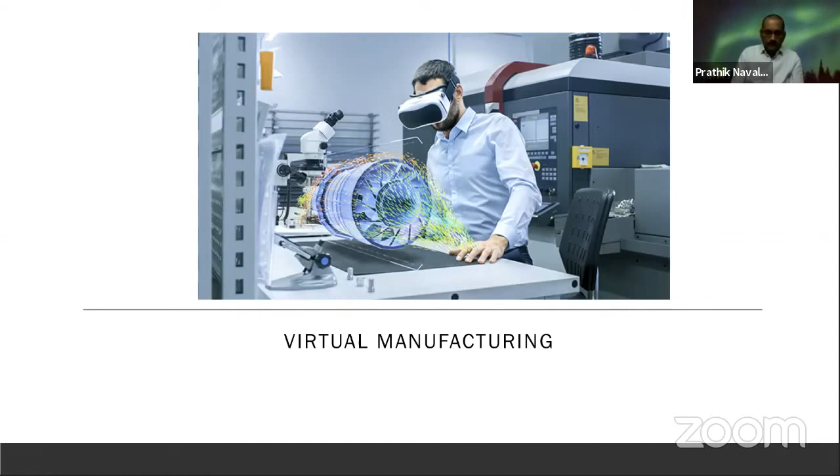Okay, so here we go. So what is virtual manufacturing? What I stated here are basically the definitions which I have understood based on my working in this field. So it's performing activities in support of manufacturing virtually. Virtually means you're off-site. You're not physically at the location where the manufacturing happens, and you're doing it on a computer.

And we know manufacturing is basically a conversion of raw material into usable form. It could be steel, it could be tubes, hoses, any other things. It is also conversion of usable raw material into finished products as per the customer specification. So these are the definitions of manufacturing which we have learned during our education.

Now, virtual manufacturing basically evolved with globalization. As companies grew and started having multiple locations, and as the need for standardization grew, there became a need for having a centralized manufacturing team. And along with that need, there was an evolution of the application, which basically paralleled the digital technology evolution.

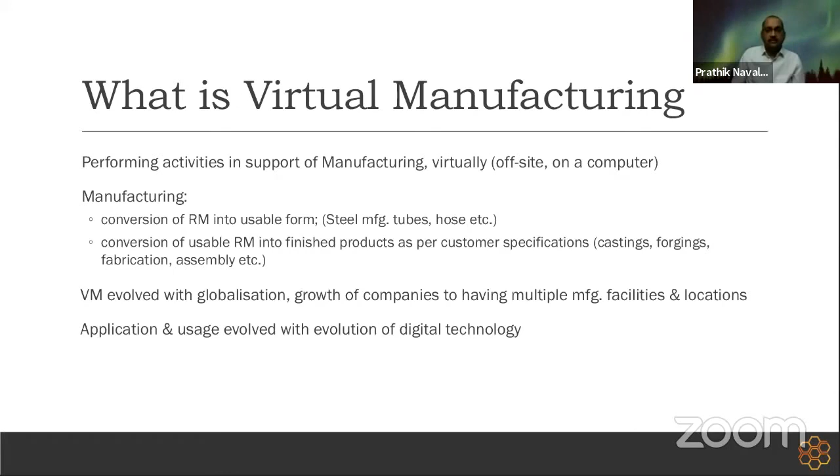So in the initial days, there was one factory located at some local manufacturing location, and they had their own local manufacturing engineering teams doing the process design, the layouts, the line design, implementation, prove-out, production. So basically, it was dedicated.

Pratik, I think your slide is not changing. Currently, what I see is the virtual manufacturing slide. Oh, is it? Sir, I can see the local manufacturing slide. It's changing, sir. Okay. Maybe it's my side.

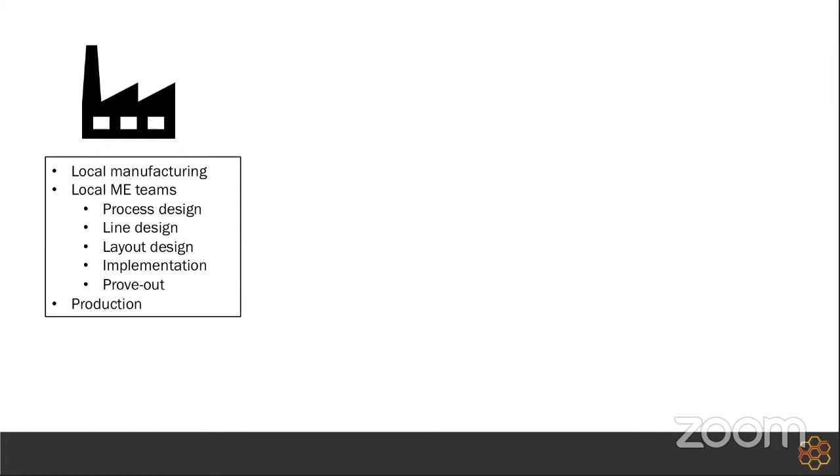No problem. So, like I said earlier, with a dedicated team supporting each factory, the companies were producing. But as the need for the products went higher, as globalization expanded, things changed. Earlier, they had a local culture, local people, it was easy to interact, they could speak the same language, and they all grew up in a similar background. Hence, the productivity, the overall outputs, the issues that came up were easy to resolve and move forward.

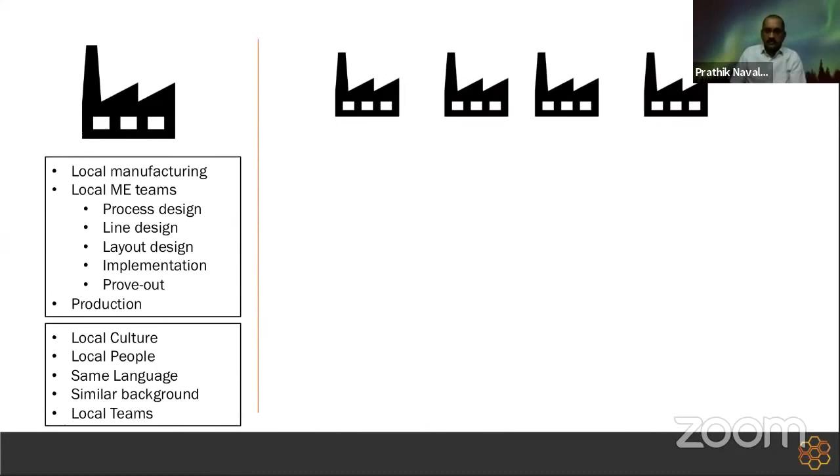However, upon globalization, the factories started at multiple locations, and either the suppliers were from different places or the same product was made in different locations. And there were multiple supplier sources, multiple stakeholders across the globe. So then came the complexity of cultural differences, languages, communication. Hence, communication became a big challenge.

So companies realized the need for standardization. No matter where the product is made, it has to be made the same way. And it has to have the common parts. Only then the cost benefit is leveraged.

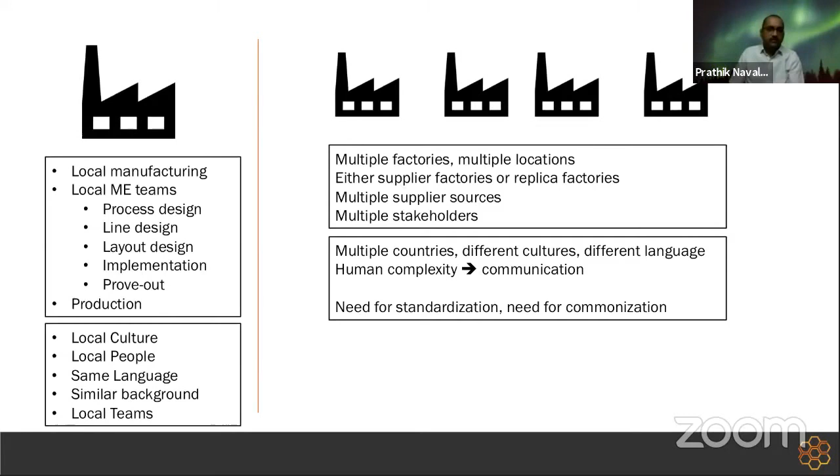So with this came the concept of virtual teams. Virtual teams, centralized manufacturing, design and manufacturing teams sitting virtually in an offshore technology center, supporting the multiple factories. And they were the ones driving the standardization of process and tools, while keeping in mind the local requirements to support the factories.

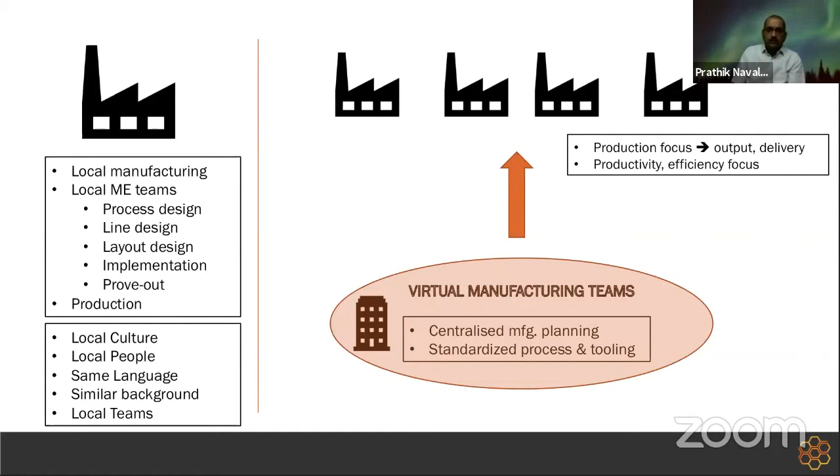And the local factories were to focus on the day-to-day work, daily production and output, production, delivery. That way, the businesses were able to leverage the best out of their investments. So this is the background of virtual manufacturing, how it evolved.

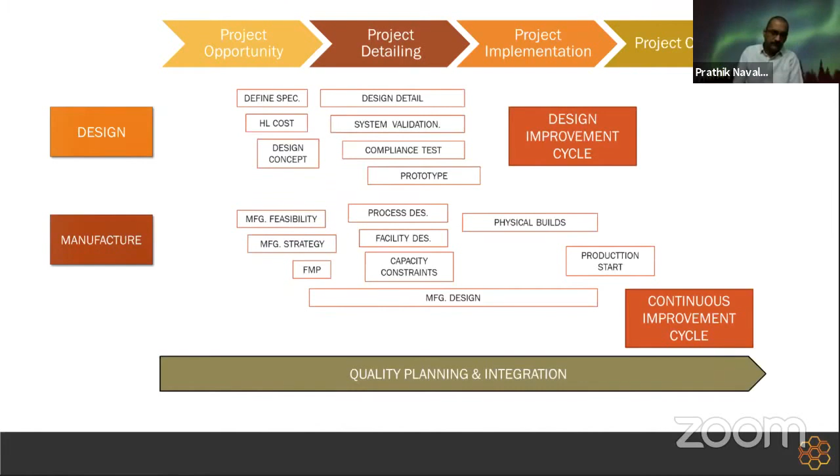Moving on, now we'll focus a little bit on the design cycle. So when we look at global design today, a design consists of parts. Parts go into a component, components go into a system, and systems go into a product. So this is probably the simplest version I could put forward to give the sense of complexity that exists in the real-time world today.

So when you look at some of the common machinery that is on the road today with agriculture or construction, there are typically about 30,000 parts that go into the machinery. So these 30,000 parts again get accumulated as components, systems, and products. So what companies do is they have their virtual engineering teams, individual design engineers designing the parts at a part level. And then there would be an integrator who would integrate it into components and systems and products. So these are today possible only with use of digital tools, like you will see in the upcoming slides.

So now when we talk about a part design, I want to also mention what is significant about part design. Okay? Although we're talking about virtual manufacturing today, it is important for us to understand the virtual engineering portion of it, which is primarily focusing on product design, because today design and manufacturing are not two sides of a coin.

They work very closely hand in hand, as you saw in the earlier product development chart. So it is very important for us to understand the constraints and the philosophy of design as the product gets progressed in its life cycle.

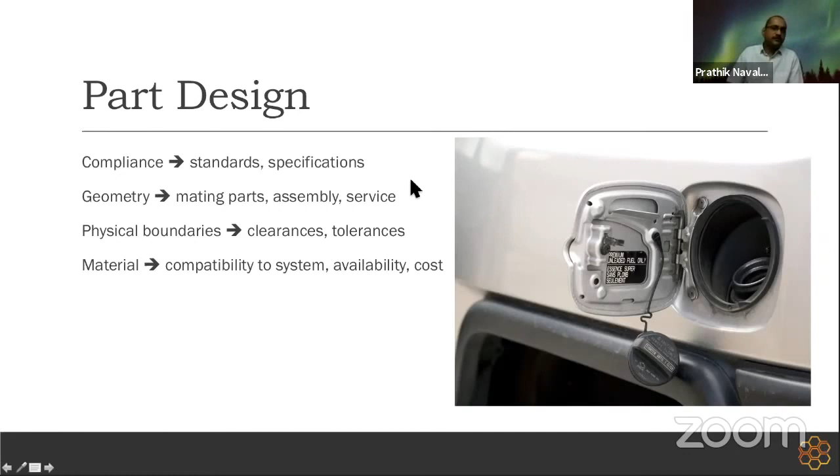So it becomes very critical for a designer today to visualize how overall the parts come together to form the component. So this is an example where the digital tools which we spoke of yesterday, and the virtual visualization, come into play for effectively designing the components. When a designer who's sitting virtually and designing a part is able to understand how it fits into the next level of the component, he is able to understand the constraints better and churn out the design first time right. And then there is virtual validation.

Virtual validation is a key part of virtual engineering, where many companies no longer go into lab tests. What they do is use the advantage of the digital technologies to do the virtual simulation. For example, if it is structural validation, we have finite element methods, and today's software is capable of handling advanced complex designs and still giving you a reasonably predictable result.

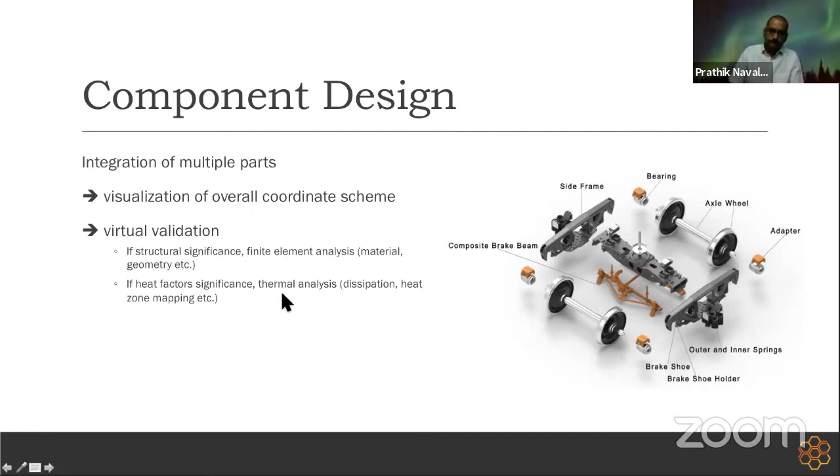And this is an example now where the finite element method was actually used not to check the structural integrity, but to derive the loading and boundary conditions for redesigning this component using composite materials. So this was for an advanced research project.

This was done. And so there we simulated the existing brake beam. This is the beam that applies the brake on the wheels for the train. And the loading conditions were put in. And this pattern was used as a benchmark or as a maximum load criteria for design of the composite bogie.

Okay. So what is of importance for today's engineers is to understand that in finite element methods, the person must have a good functional understanding of the system before he or she gets into it, understand the material properties, the boundary conditions, the loading, and also the interpretation of the results.

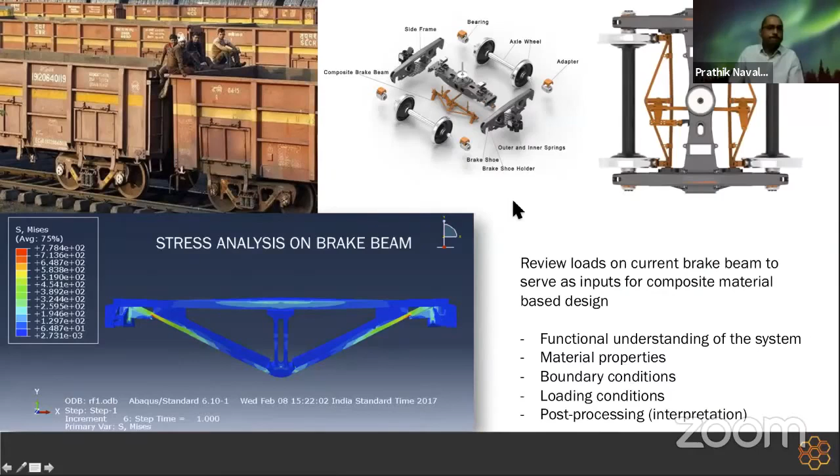Again, here it was also used as we had benchmarked an existing bogie to validate the loads and boundary conditions for a new bogie bolster design. Again, a practical example being used in the industry today.

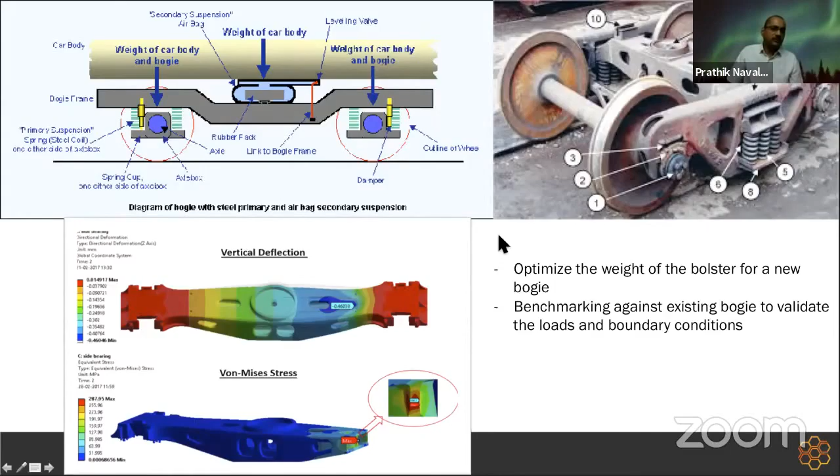So we spoke about part design, we spoke about component design. So next stage in this is a system design. So when the components accumulate to form a system, when the components are integrated within a system, it's important to make sure there is a functionality check that is done. Okay, so there are several tools today in the market for performing.

For example, if we take the suspension system of a two-wheeler or a four-wheeler, it is going to be complex for us to go and do manual calculations and also visualize how the system would function on the road, right? So earlier, how they used to do it is they used to have cameras embedded to understand the vertical and lateral movements and have strain gauges attached to them to understand the loading criteria.

So now what's happened is with advance in the digital front, there are softwares available to perform what we call multi-body dynamics, to understand the dynamics of the interaction of different parts, what we call bodies, which interact with each other and which are constrained by each other.

When a suspension system is attached to the chassis and to the axle, it is constrained at those 2 points. So when it functions, it is not allowed to freely function, but it works under constraints. So that's a simple explanation of that. But MBD assessments are very common today in the automotive field.

Then the other thing that is done is clearance analysis. Again, when multiple parts, to the level of 30,000 parts, are going into a system, and if there are 25 different engineers working on it, it's very common for people to miss out on some of the features of the part.

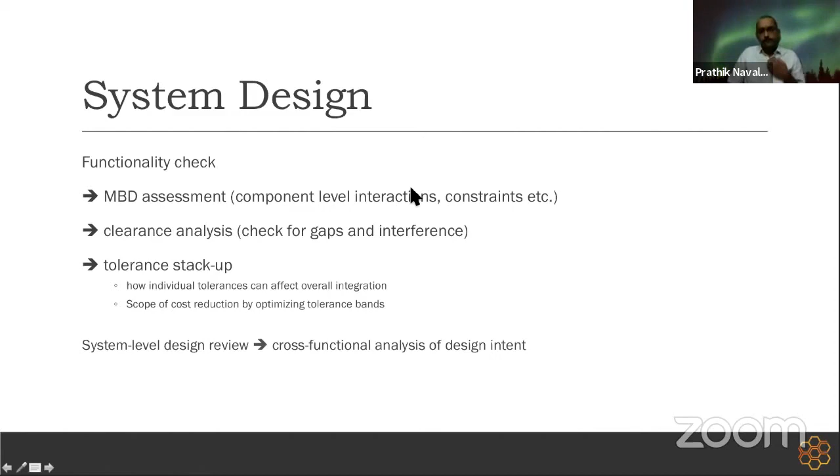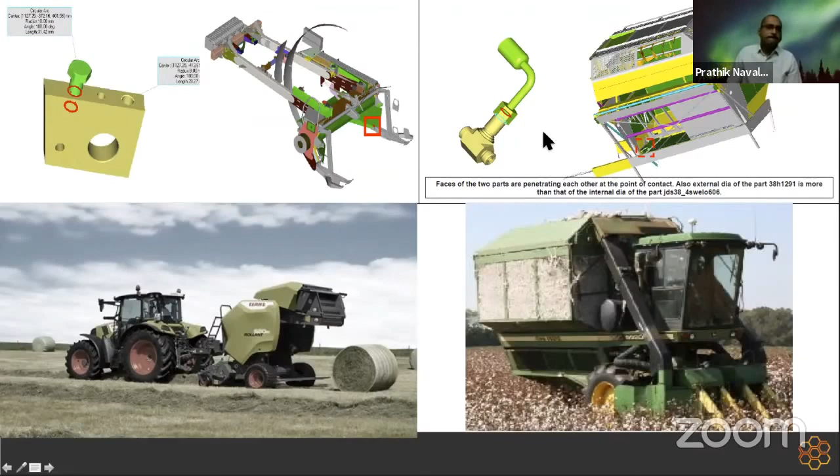Another example that you see here is on a cotton picker, again, for the basket, where there are multiple components that are welded and assembled. There is a clearance analysis that was performed, where for the joints, again, the clearances between the two faces of the mating parts was high. Again, this is a practical example of where it is used in the industry today.

Next, we talk about tolerance stack-up analysis. So while this has been a quality function, nowadays it is falling on the plates of a manufacturing engineer and in some cases a design engineer, where at the time of design itself, they go back and validate at a system level and at a component level how the tolerances stack up and what room they have to increase the tolerance bandwidth so that they're able to reduce the overall cost.

And what you see here is a typical representation. When the tolerance band is wide, the cost is lower and the yield is high. Yield means the output. The first time right is the yield. And when the tolerance band is reduced more and more, the costs become higher and the yield becomes lower. Okay? So it is very important for a designer today to ensure that the tolerances are done in a commercially viable sense, at the same time, functionally viable sense. So next, we'll see a video of how the digital tools today enable a manufacturing engineer to perform this analysis as he validates the design.

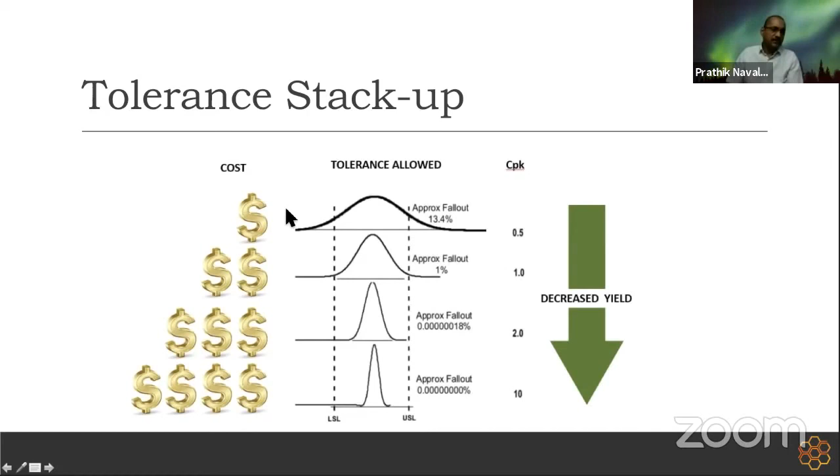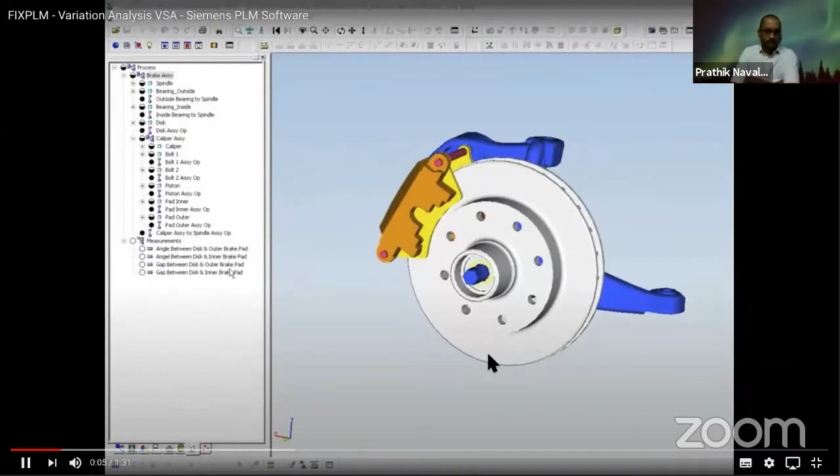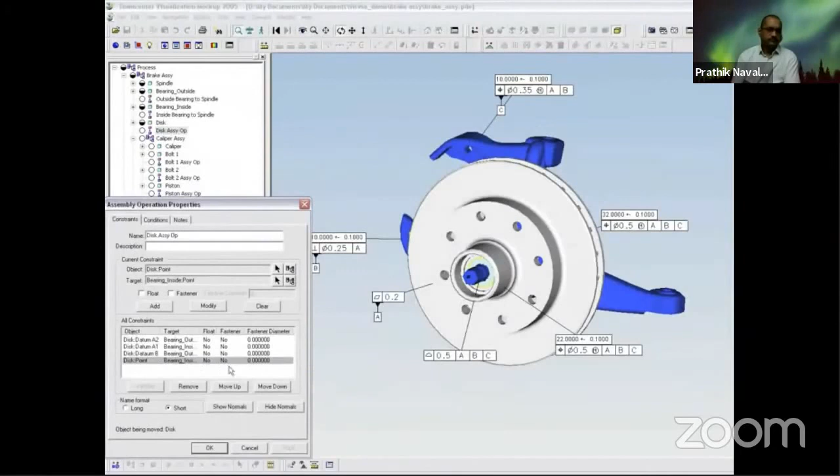Variation in assembly build problems. In this example, we'll look at the variation introduced through the process of building an automobile brake assembly, where controlling the angular variation between the brake pads and the brake disc is critical to the proper function of the braking mechanism. The entire process model is represented in a tree structure on the left side of the window. The process tree contains all the elements that comprise the analysis: parts, assembly operations, and measurements. The features contained within each part that are used as datums in assembly operations or for measurement are toleranced using GD&T, or geometric dimensioning and tolerancing.

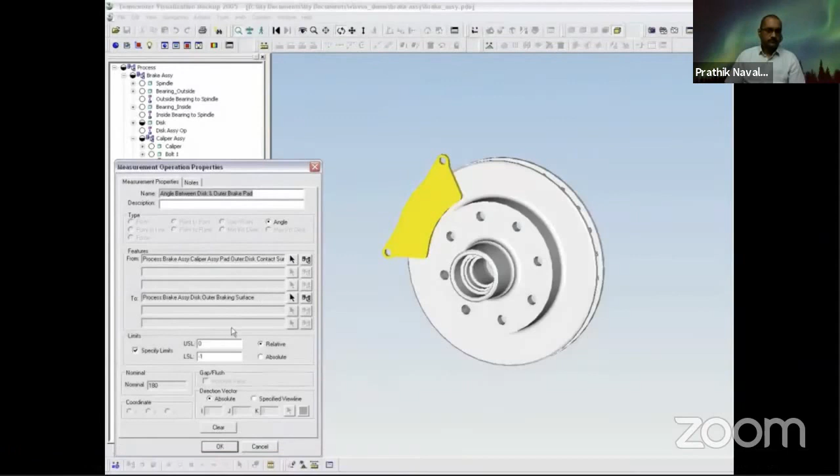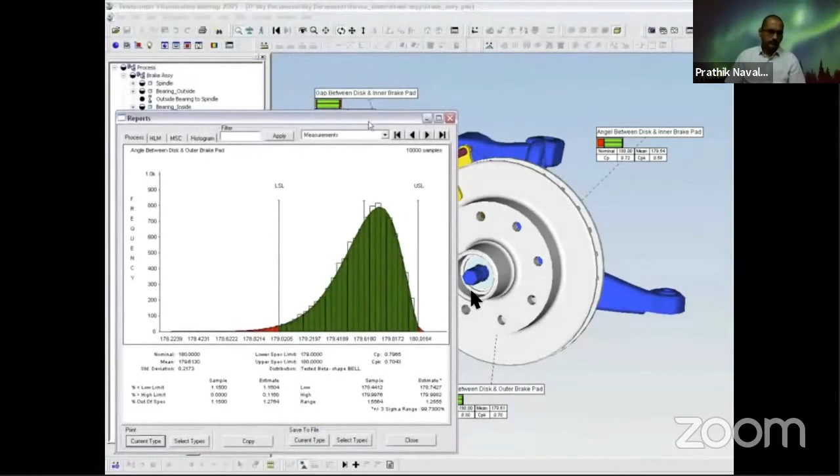Once the features and tolerances for all parts have been defined, assembly operations identify how these parts will assemble or interact with one another. The next step is to define the measurements for the critical dimensions to be controlled. In this case, the angle measurement between brake pad and brake disc. Once the process model is defined, simulations that replicate the virtual build of the brake assembly are run. From the reports generated, the variation magnitudes and contributors may be viewed for each measurement. Model parameters, such as tolerance values, may be changed and the simulations rerun to ascertain the impact of the change across the entire assembly.

So what we saw there was the tolerance stack-up analysis for this wheel disc assembly as it was narrated. And this is something that today is a very common sight. You go back and see design engineers and manufacturing engineers who use such tools. There are many tools available in the market where they are able to concurrently modify the designs and determine the adequate tolerances for the parts, thus being able to deliver a product first time right, at the same time at the right target costs. Okay.

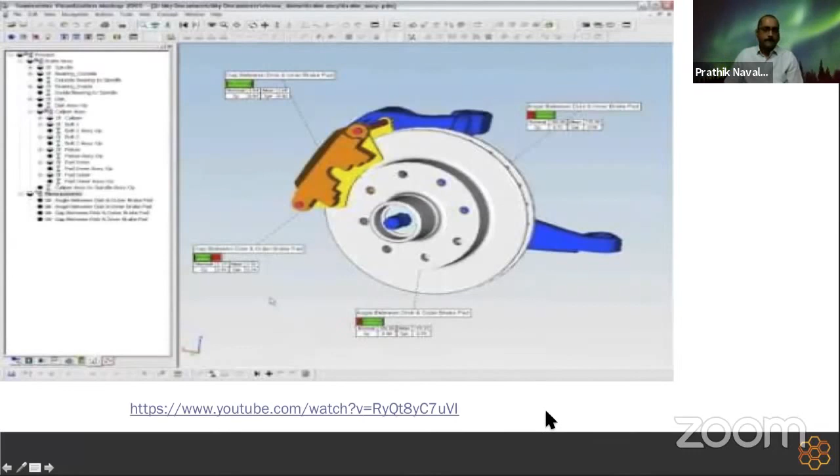So just a second. Okay, so next we come to, so we saw part design, we saw component design, we saw system level design. Okay. So now when all of this integrates into a product, that is the end saleable commodity for which all the groups have been working towards. So it's important for the designers now to look at systems integration, how the systems integrate. So this is a very, very important and critical function that you will see in the video to come.

And as they look at the integration of systems, they are able to dynamically modify the designs through digital technologies available today. Another key feature which you will see is the marketing alignment. Much earlier in the concept stage itself, companies today use virtual reality capabilities to showcase the upcoming product to their dealers and their customers, to receive live feedback so that their valuable feedback gets integrated much earlier in the product design lifecycle. Again, another video that I'll show you towards the end showcases this capability.

And then the compliance check. Okay, today when a tractor is designed, when a car is designed, they have to comply to certain specifications, such as the turning radius, the overall boundary of dimensions, the emissions, etc. So these are possible, again, like I mentioned before, through use of virtual tools.

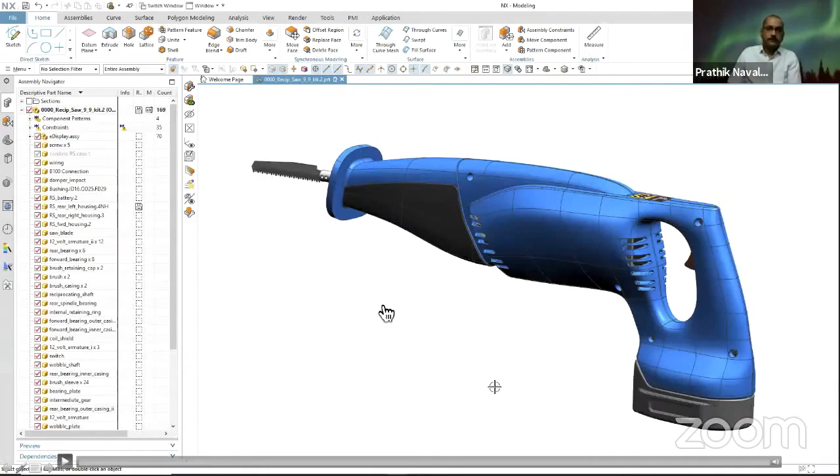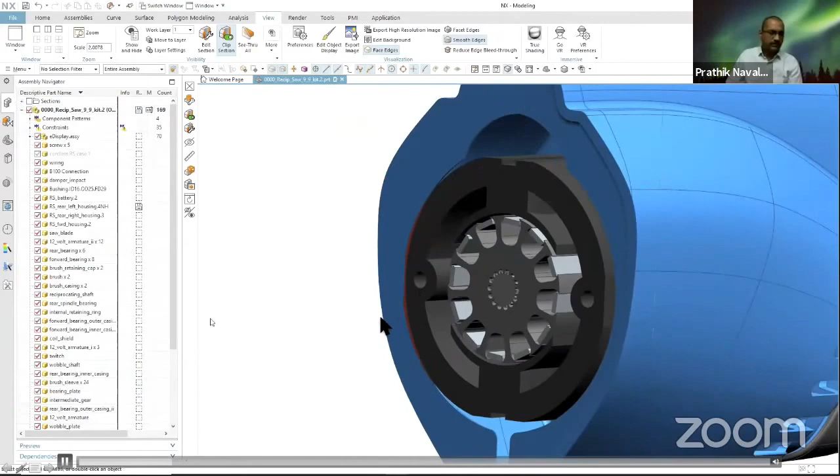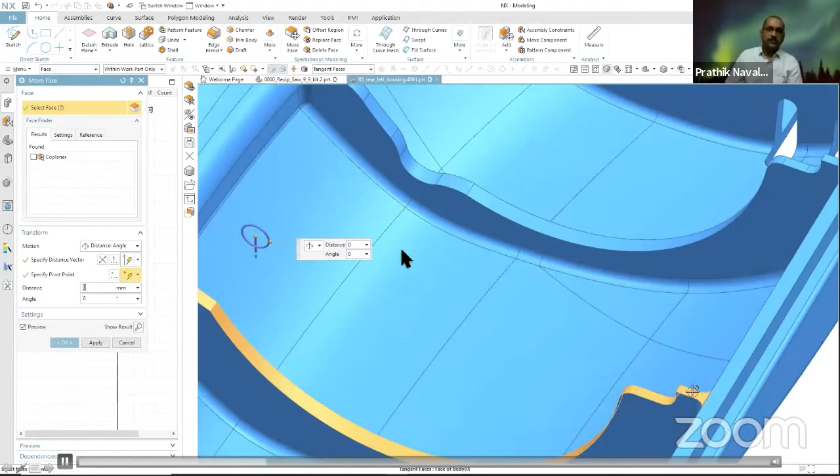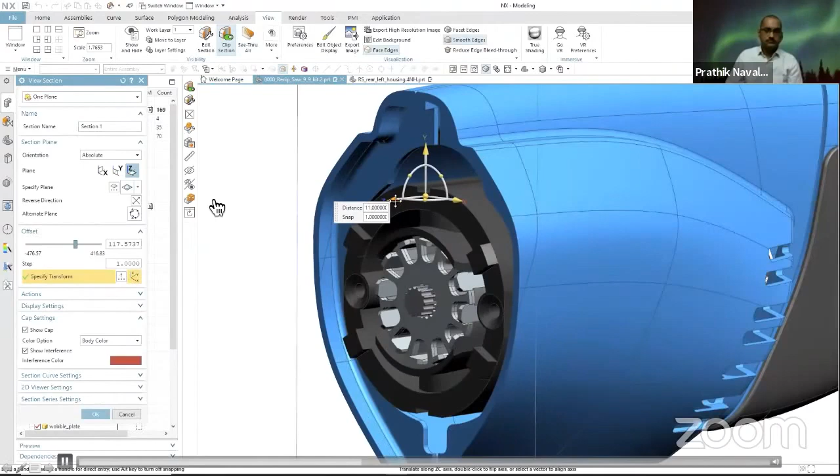Right now, at the time this part was designed, the designer might not have been aware of potential interferences. However, at the time of integration, you see such interferences come into notice, and then the integrator is effectively able to go back and make minor adjustments to the design. So it doesn't have to go back into the entire cycle of redesign again. So he is able to effectively visualize. He doesn't have to physically see the product.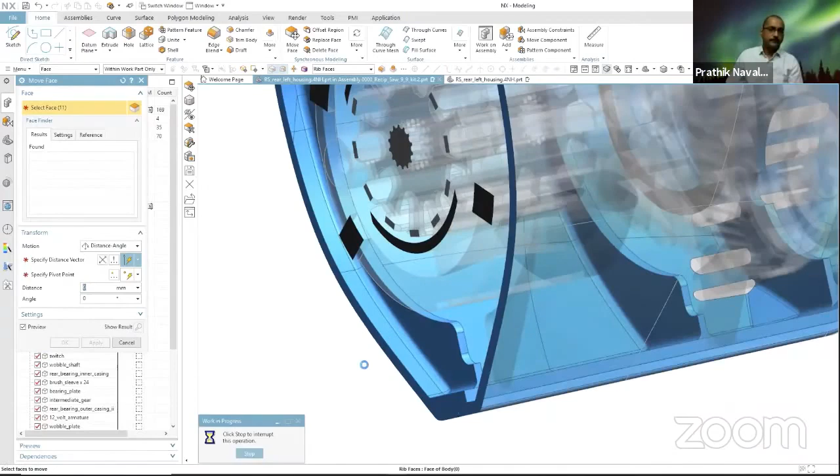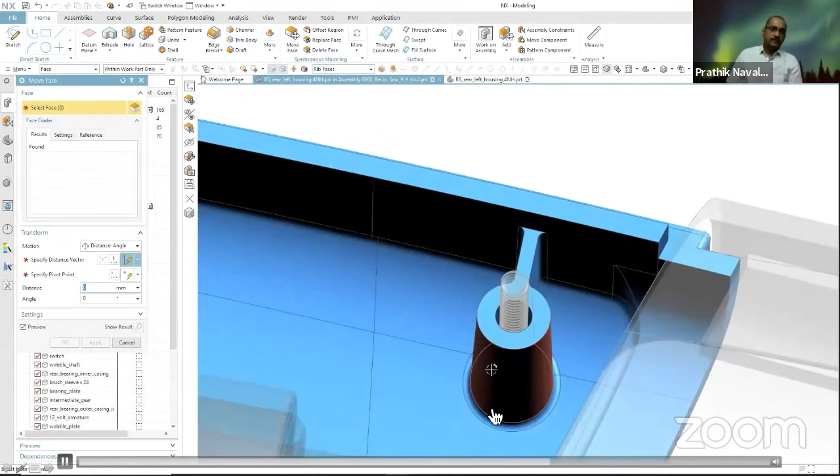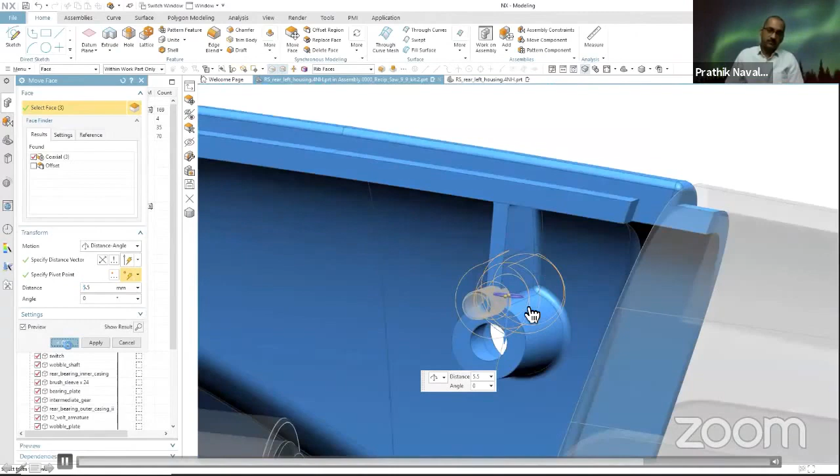So now this particular change will be very interesting. After all the parts are assembled, it is realized that the height of this particular feature is not right. So he's able to go back and now modify the height of that feature and quickly correct the design. You can see how there is a misalignment. And so he's able to align, if you see there is a radius earlier where this feature was. So he's able to move the radius and quickly be able to correct the design. So this is another example of virtual manufacturing.

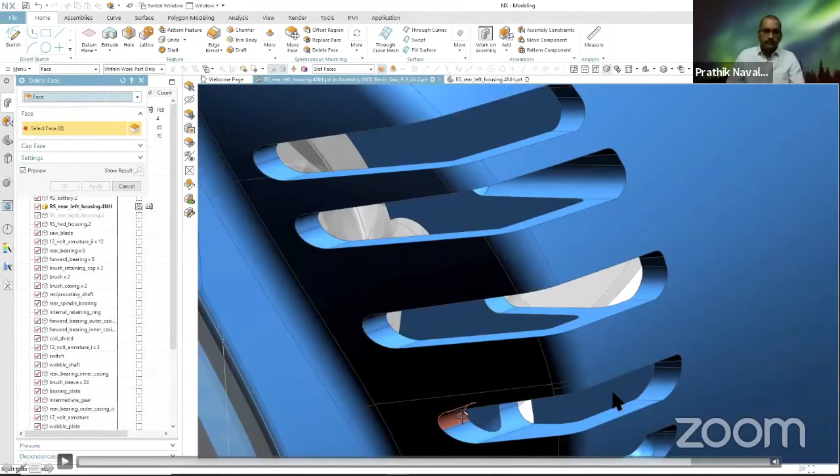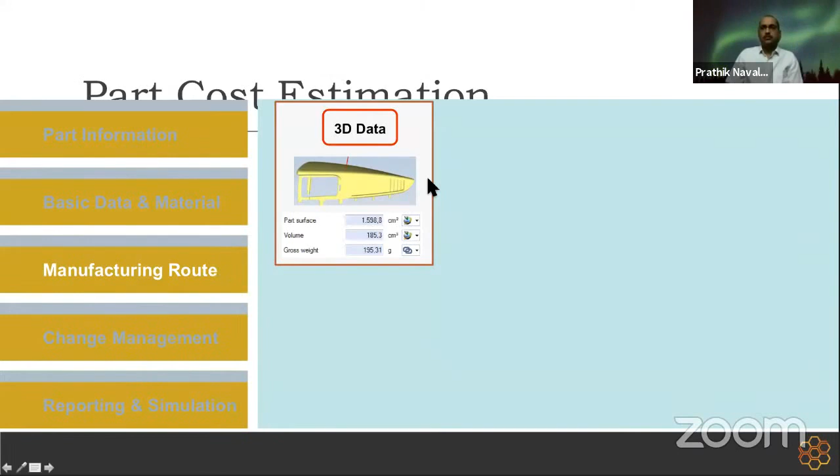So now what we'll see is a part cost estimation, how this is used in today's world. So the virtual tools, there are virtual costing tools that are available in the market today, which are used for effectively managing the cost of the total product. So the 3D data is taken, and then the materials are assigned. Then the cycle time of manufacturing is estimated, again virtually through the information available in the system.

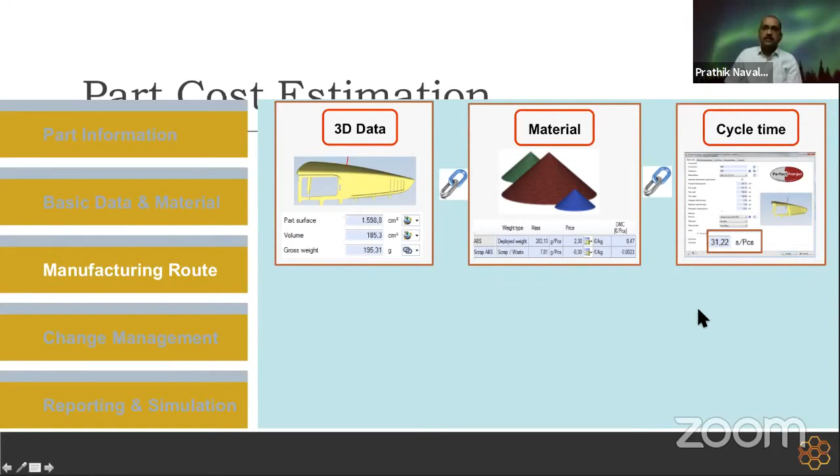And then the cost per hour based on the location where it's manufactured, that is fed into the system. And then the overall manufacturing cost is able to be derived. Okay, so all the data right from the product design and the material to the factory cycle time, the overall work content of the product is now available for the engineer to go back and estimate the overall manufacturing cost.

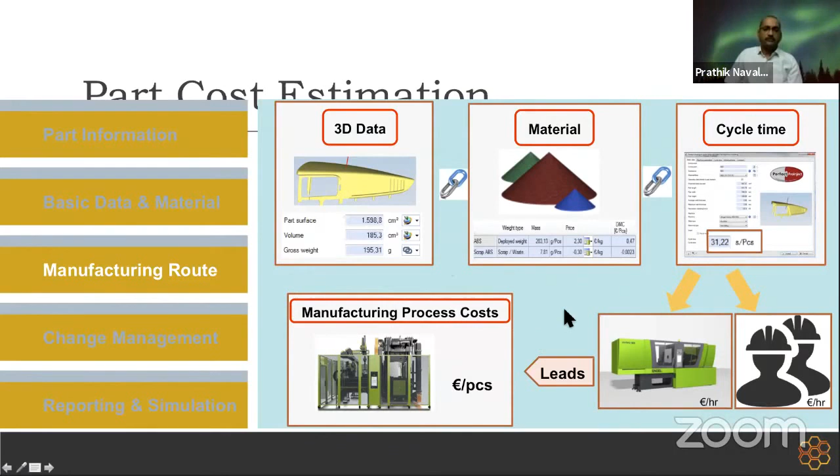So we look at part commonality so that we are not going in, like for example, fasteners. We don't want to keep on adding different varieties of fasteners as new products get developed. So we want to look at common parts that are already existing in the system and try to use the same part as much as possible. That would help reduce the cost and help reduce mistakes on the line. Next one is the product complexity.

While companies focus to deliver what is important for the market, they also today have to keep an eye on the overall complexity as it would impact the overall manufacturing cost and the feasibility of manufacturing. So this is a place where the digital tools come in very handy, like you will see in the further slides to come, where an engineer is able to sit off-site from the factory and determine whether the design is feasible to make or not, and what are the changes that are needed to make it manufacturable.

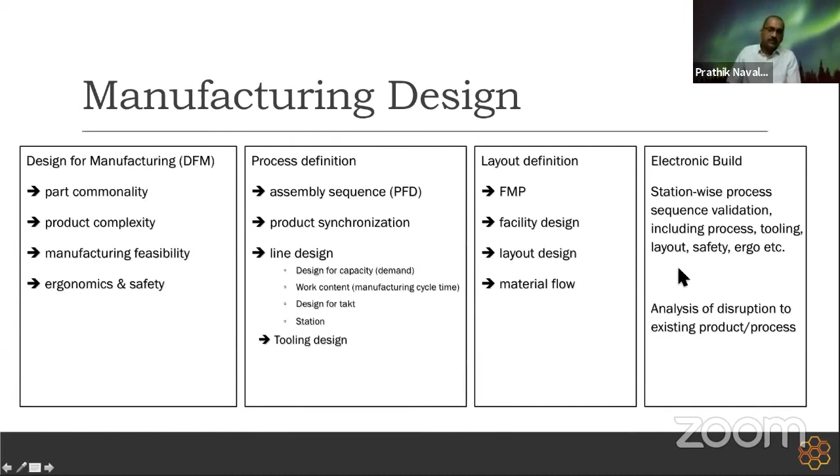So one of the key factors is design for manufacturing. You will see some pictures in the next slide of some of the effective designs and some of the poor designs also. But it's important for us to understand the need for design for manufacturing. So what happens if a design is made and then the part is manufactured and then you find an issue? You have to go back and redesign it. So there is a cost impact on account of that change, because you make a mold or a tool, you build the mold, you make the part, then you decide the mold has to change. So the cost of doing that is going to be higher as the product cycle progresses.

So it's very important for engineers today to identify problems much earlier in the stage. So that's where the need for DFM comes in. So here specifically, we'll talk about design for manufacturing and assembly. There are various DFMs. There's design for casting, design for machining, design for paint, design for serviceability, etc.

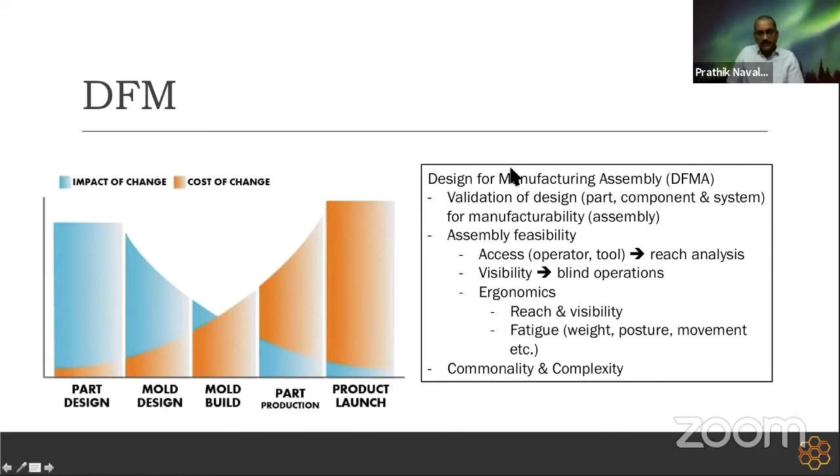But what we focus on today is specifically design for manufacturing assembly. So what we mean by that is the design gets validated at a part, at a component, and at a system level for manufacturability, for assembly. So what they check is whether the assembly is feasible, whether the operator has access to the area where a part has to be assembled, where the tool has to be reached.

So today the software are available for performing reach analysis virtually, then visibility analysis. Because one of the things that's detrimental towards productivity is blind operation, where the operator cannot physically see the part that he or she is assembling. So engineers today validate such things early in the design stage, and then they try to eliminate as much as possible.

The other one, like we talked about ergonomics, when we say ergonomics, we're talking about reach of the operator, we're talking about the position, because there is a nominal height, working height below the shoulder level, which is the best to reduce the fatigue of an operator. Then visibility, like I mentioned, blind operations. Then the weight of the component, the posture, the movement, etc., which causes fatigue to the operator.

So today, the designer or the manufacturing engineer is able to validate all of these through digital tools and recommend changes in the design, or if that is not possible, design alternate processes to mitigate some of these issues.

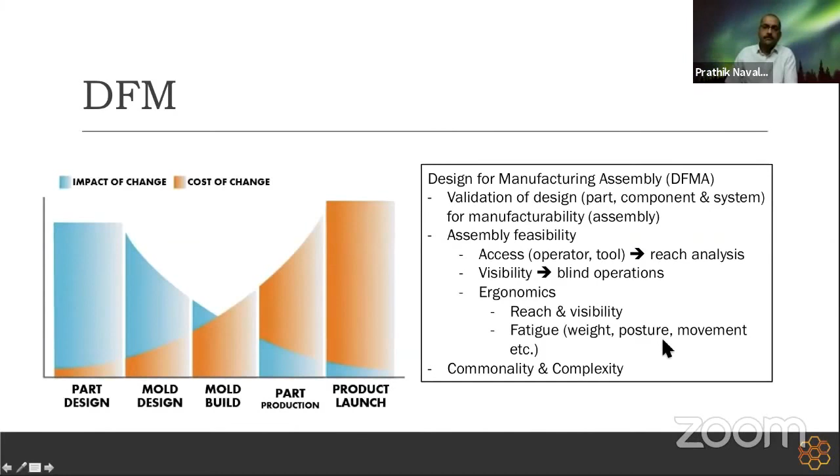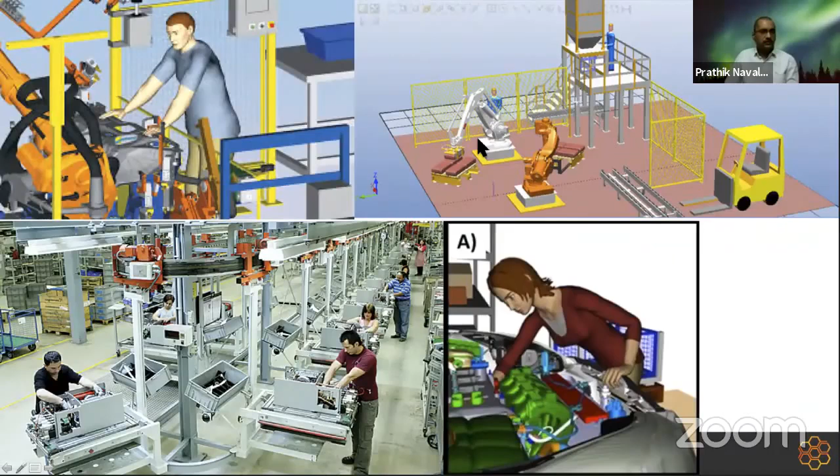So keeping that in mind, the manufacturing engineer has to design a tool or the process or the work table for these operations. So this is again a use of virtual tools. One is able to perform such validation. Another one that you see on the bottom right of the screen is where this operator is bending down to do an operation. Again, you can see where she has to stretch to do that operation.

So when they do this, if the stretch is inevitable, unavoidable, then they will work on having lesser number of hours for this particular operator, and then they will change the operator frequently so that the fatigue doesn't come in. At least today, virtual tools enable the manufacturing engineer to identify such areas and plan for them accordingly.

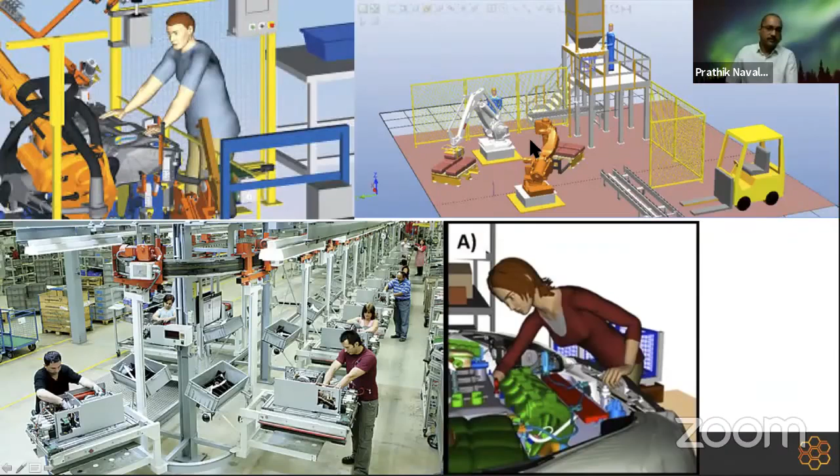What you see on the top right here is a virtual cell where there are 2 robots performing a pick and place operation. And this is the level of visualization that is possible today, where you're able to plan for space for a forklift to bring in the part, and also study the movement and the accessibility for these robots to perform the operation, and also virtually program these robots to avoid collision. Okay.

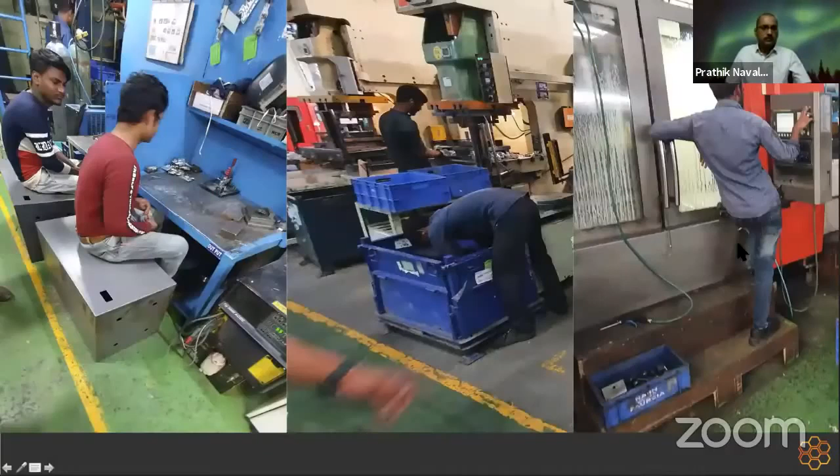Here is an example where the operator has to bend down to pick up a part. Again, ergonomically not recommended at all. So today with virtual engineering, virtual tools, we are able to plan for avoiding such situations way ahead of time. And here is an example where, again, poor ergonomic posture where the machining center is being programmed with a makeshift arrangement.

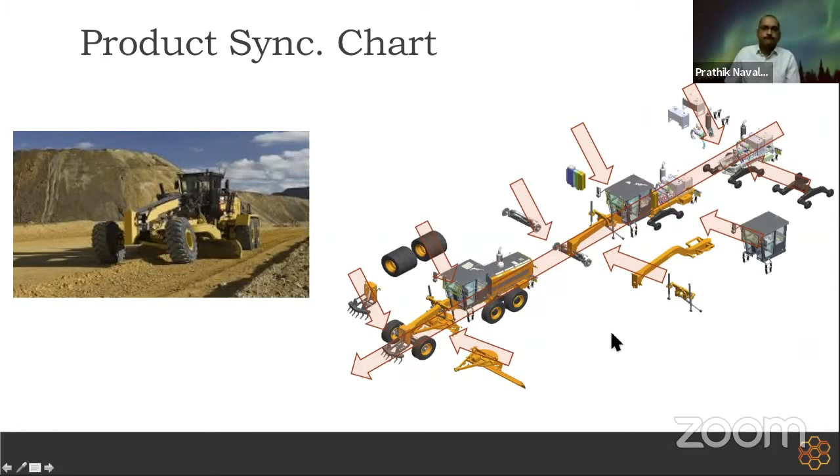Another key aspect in virtual manufacturing today is material presentation, how the material is presented to the line, which has a direct impact on the productivity and the safety. Apart from that, it also has an impact on the cost, because when more material is able to get shipped from a supplier to the factory, you're able to optimize the transportation cost.

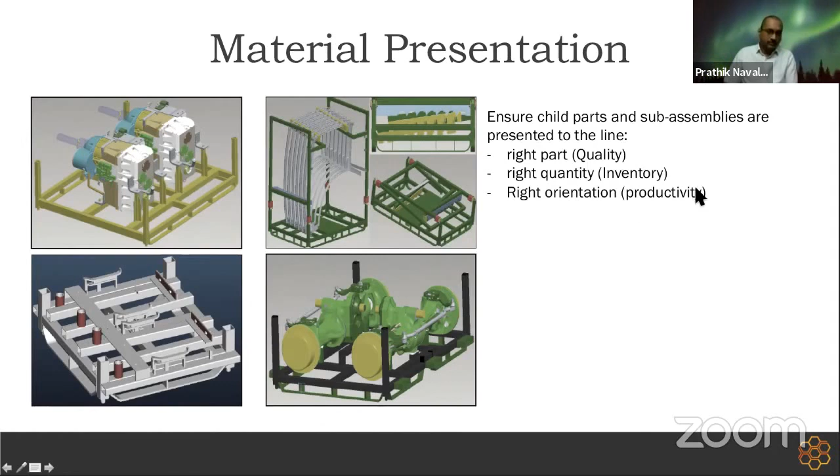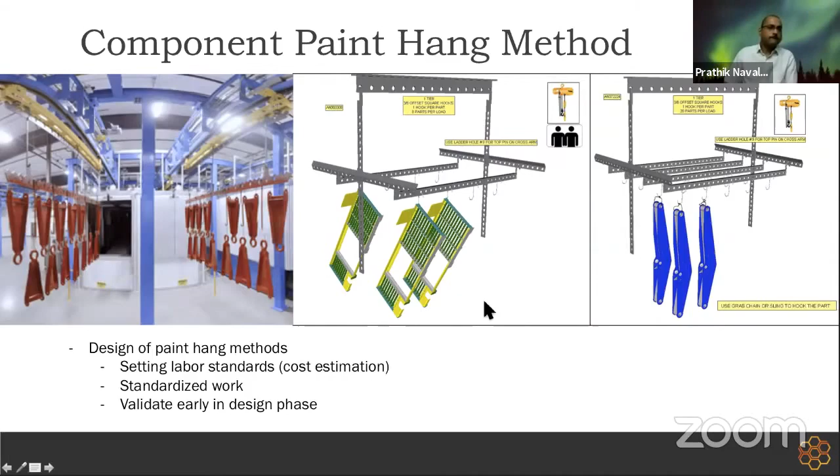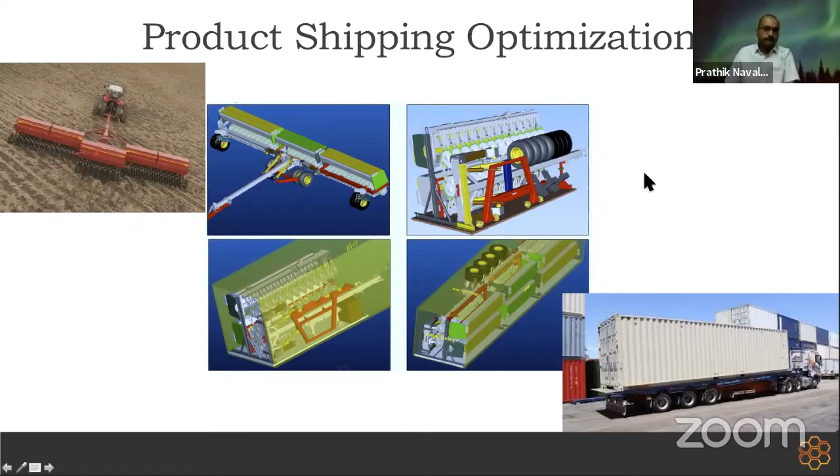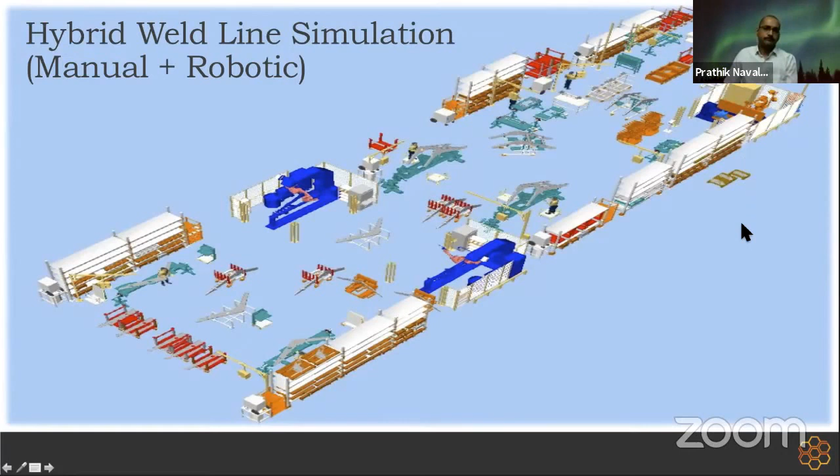So this is what a manufacturing engineer today goes through in his routine job when he works on the new product development life cycle in the industry.

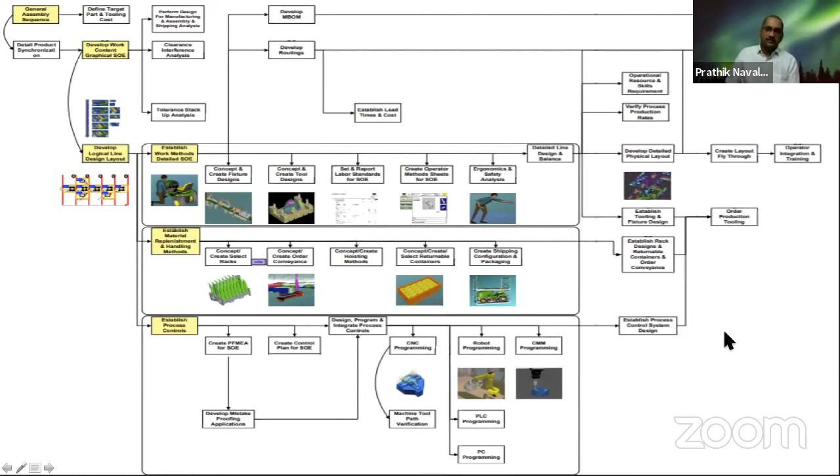Okay, so now we'll end the session with a video, which is actually a commonly available video on the internet, but it demonstrates the real-time situation where virtual reality is used today for various applications in the product development lifecycle.

Again, this is a video that is available on the public domain, so anybody can go.

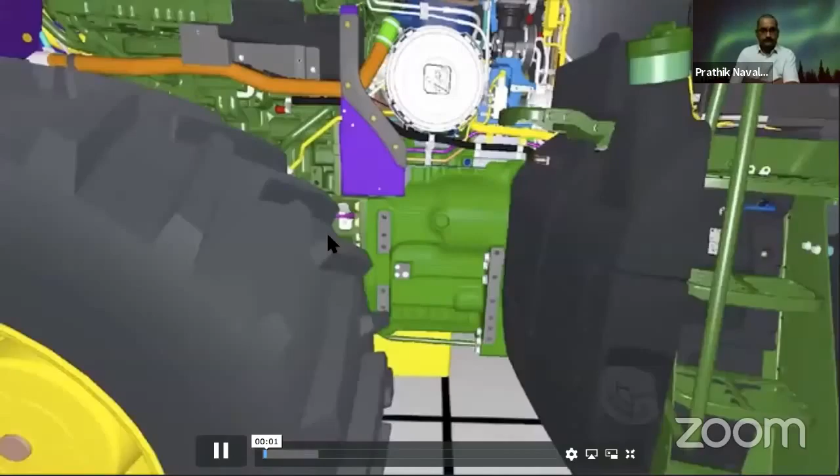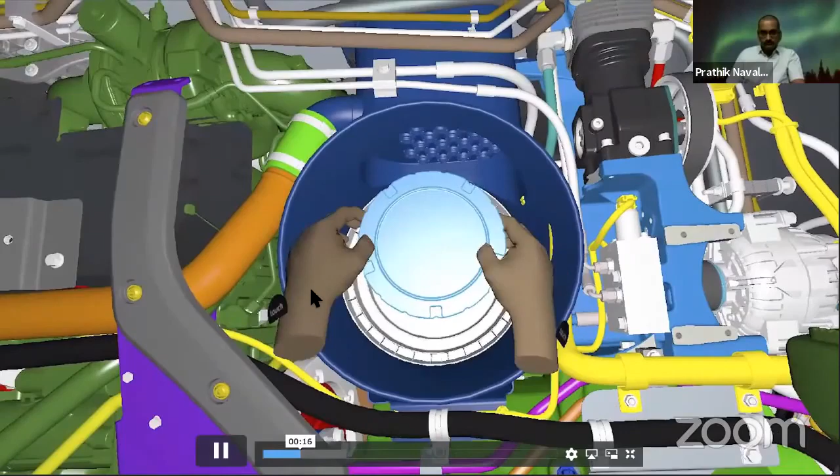Being able to physically get your hands on a tractor without physically getting your hands on a tractor is very important, in my opinion. This technology allows us to visualize tractors earlier in our design process, so we can shorten the time from concept to production. Tractor platform customer support engineers are using different visualization tools to view three-dimensional models prior to any physical builds.

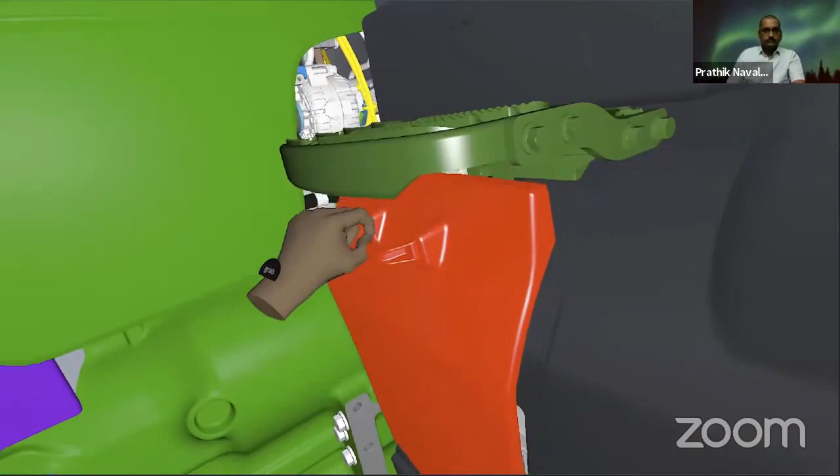We used IC.IDO software paired with an HTC Vive headset. And this combination of hardware and software allows us to open a complete tractor, 15,000 plus components. It's just like being there on a tractor. Participants can take apart a tractor, disassemble, cross-section tractors in real time.

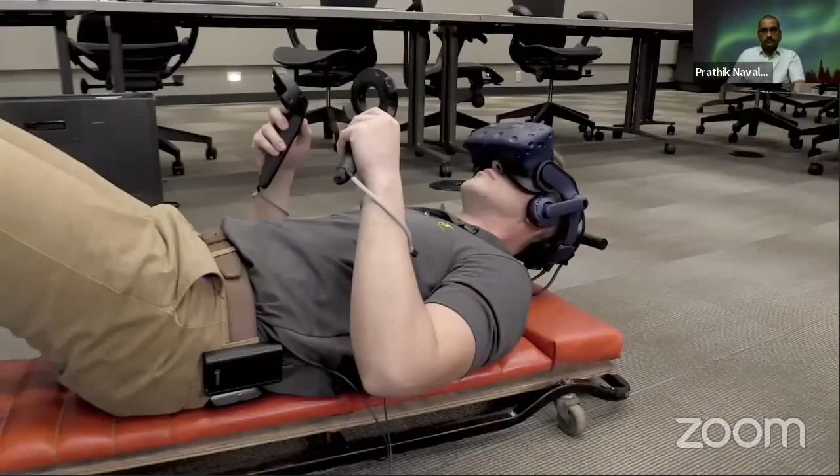Probably one of the neatest things that I've ever done was, for the first time, I actually put on a headset and rolled around on the floor pretending that I was working on the tractor, where just 2 years ago, I was actually doing that on a shop floor, but this time I wasn't actually getting dirty.

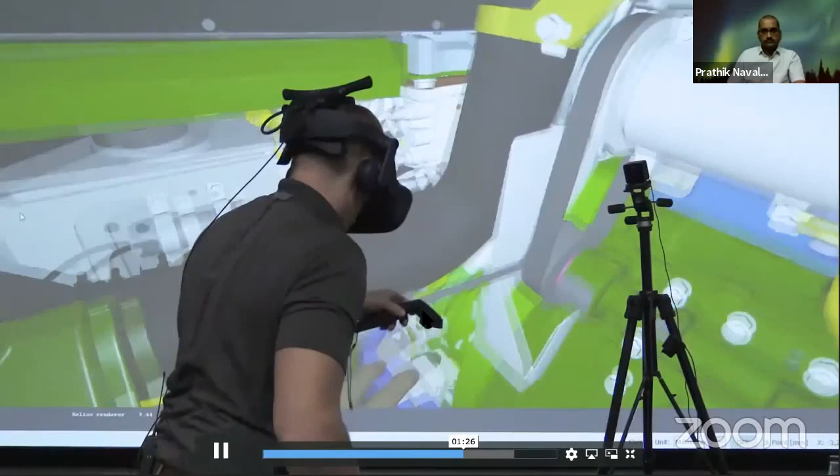So we like to use Creo View and visualization to see how we have access to different components on the vehicle. We use virtual tools when we can't come to a solution using traditional 2D models. Usually we find issues with tooling or design or facility layout. We show them in 3D models as well as the virtual environment to get a better understanding of how we can better influence our tractor design.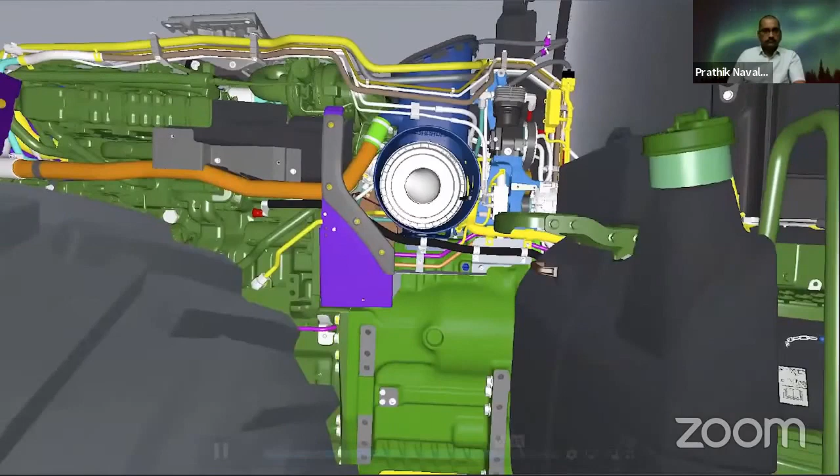It saves a lot of time and money being able to virtually evaluate it before you build hard parts. This technology makes my job easier because the engineers are working with their own geometry in a natural way. And we use many tools to design tractors, and this is just another one.

Okay, so those are some of my colleagues during my earlier job, but this is what today a manufacturing engineer sitting in a technology center virtual environment works on in reality. So that brings an end to my presentation today.

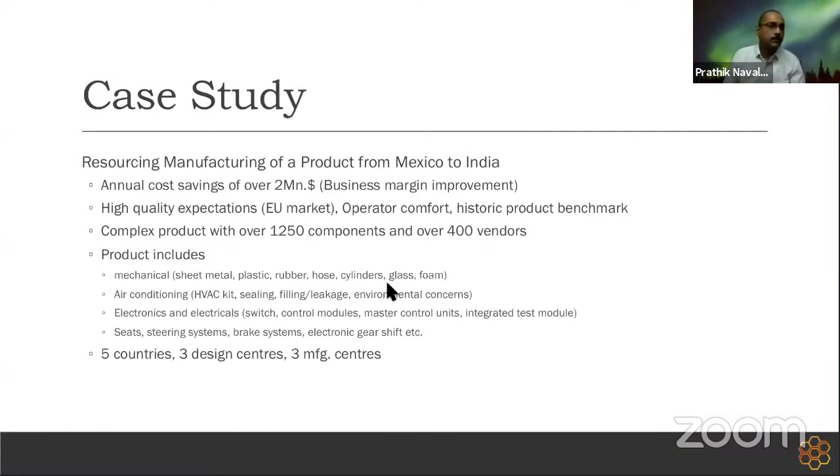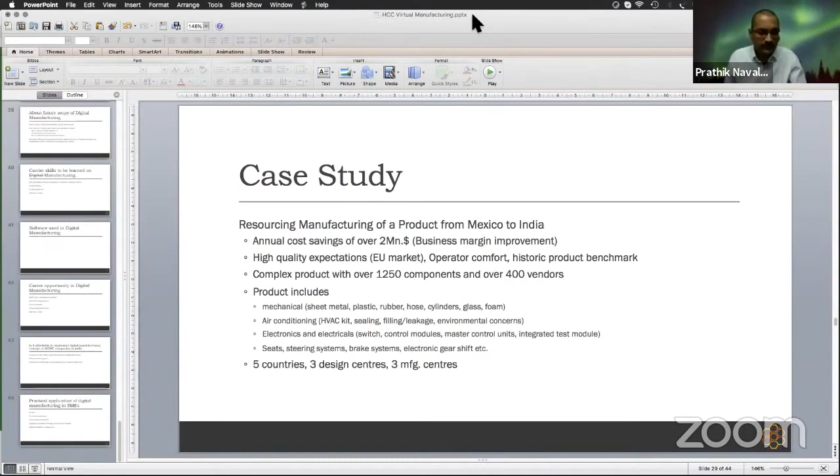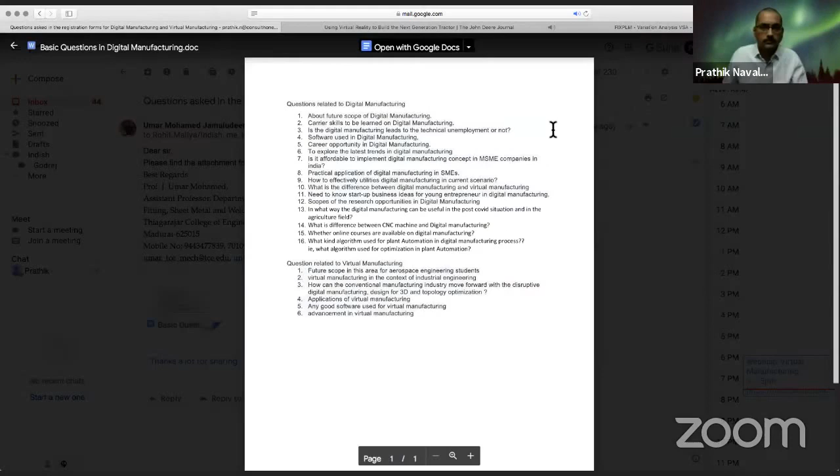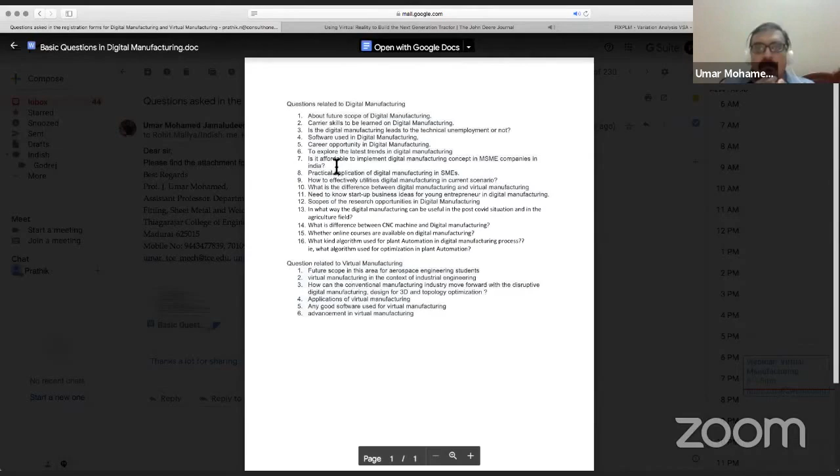And Mr. Umar, if you want, we can go into the question answer sessions. Okay, sir, you can go to question and answer. Sir, you can go to question session, sir. Yeah. Some questions I have mailed. Okay, so I will go into the question session, just a second. Just give me a second. Let me open the question list that you sent me. Okay, so I will open the questions document. Can you see my screen? No, sir. Yes, sir. We can see. Yeah. So there are many questions. So I'll probably do about 10 questions in the paucity of time.

So one was, what is the difference between virtual manufacturing and digital manufacturing? Okay. So I think we have now covered that topic. Yesterday we did digital manufacturing, the use of digital tools to aid the manufacturing function. Now digital manufacturing is actually a subset of virtual manufacturing. Virtual manufacturing does not necessarily mean you use digital tools. You sit at an offsite center, use a computer, and support manufacturing activities. And digital manufacturing enables the performance of the virtual manufacturing function. So that's the relationship between the two.

The other question that we had was, what is the future scope in this area for aerospace engineering students? So obviously aerospace is much advanced in its design and manufacture compared to the automobile and other fields. So there will be a lot of scope. Virtual manufacturing and digital manufacturing in the aerospace domain is much more matured. So when a student gets into that domain as a designer, as a manufacturing engineer, it would be much more challenging, and they would have much more scope in this field. Okay? Because virtual validation, virtual engineering is very, very critical given the cost and the size of the product.

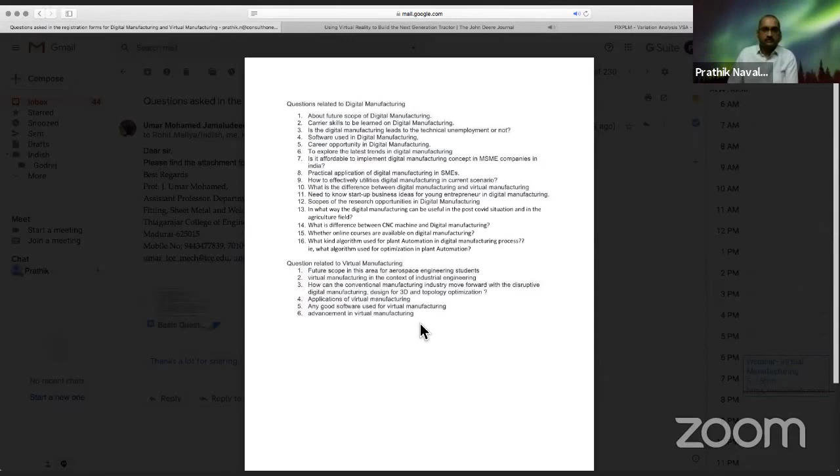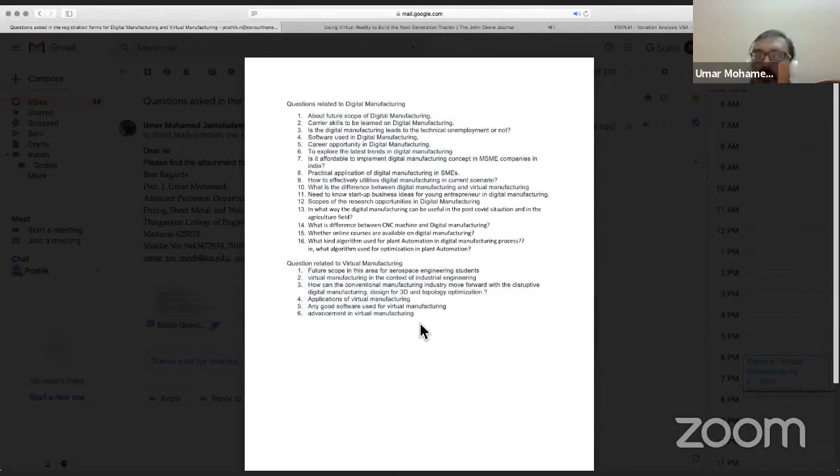No, sir. Thank you very much. Thank you, sir. Shall I conclude, sir? Yeah, conclude. Sir, am I audible? Yes, yes. Okay.